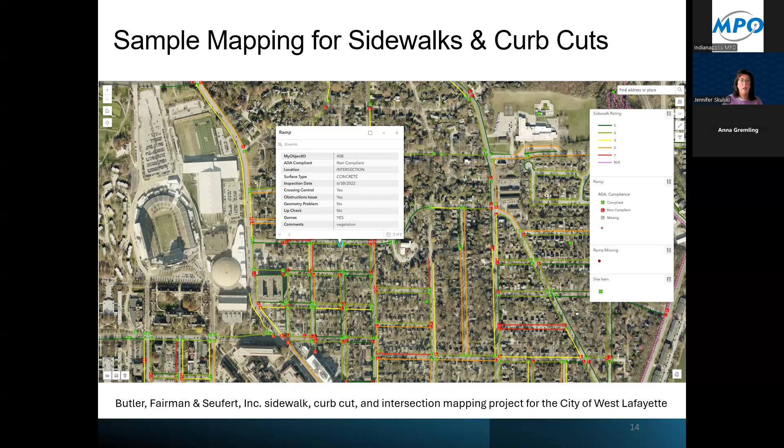You could do that manually. There are also a couple different programs now that use visual AI to do the mapping so that you wouldn't actually have to bend over with a smart level or a tape measure to measure the running slope or the cross slope. So some other reasons why it might be necessary to revisit your self-evaluation and transition plan: maybe it was never completed or only partially completed in the 1990s.

I will tell you, if you get an ADA complaint, during the investigation process with either the Department of Justice or the Department of Transportation, the very, very first question they're going to ask you is, where is your self-evaluation? Where is your transition plan? So those documents serve as your first line of defense, those CYA documents, to show that you know that the barriers exist and this is your timeline for removal.

Maybe you've had inquiries from the disability community about, when are you going to make a corrective action on Allisonville Road? Maybe some facilities have changed substantially from the data that was originally collected in the 1990s, and that data hasn't been updated. And so that would be another reason to revisit those. Your agency policies might have evolved.

We had a situation with a very large city that in the early 1990s had modified a policy to make it compliant with the ADA. And then with all that staff turnover, the policy got changed back to its original, and it was no longer inclusive or welcoming of people with disabilities. And so that was one thing that we uncovered through the self-evaluation process, that this got changed back and people didn't realize that it had been changed for the purpose of inclusion of people with disabilities.

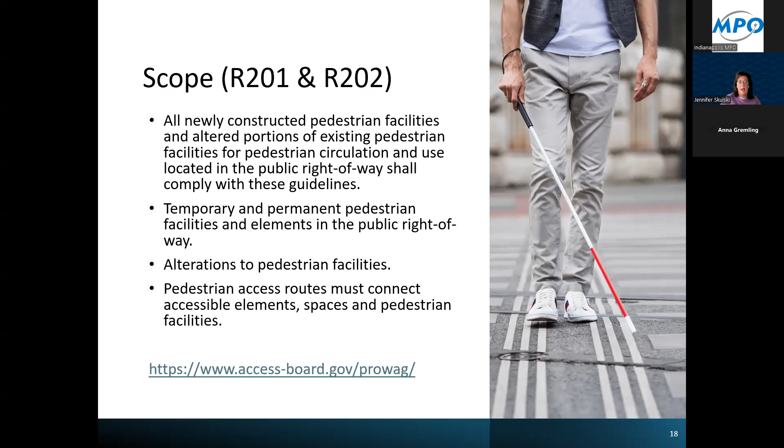So if you have a city block where construction fencing is going up, and they're doing construction around the entirety of the building and the sidewalk is closed, because you provided that sidewalk, you need to provide a temporary sidewalk, and that temporary sidewalk has to be accessible. Then there are alterations to pedestrian facilities, and the pedestrian access route must connect to accessible elements, spaces, and pedestrian facilities.

So some of the other scoped elements include alternate pedestrian access routes, transit stops, passenger loading zones, and detectable warnings. Detectable warnings are here to stay now. Pedestrian signal heads or pedestrian-activated warning devices, protruding objects, vertical clearance, pedestrian signs, street furniture, transit stops and transit shelters, on-street parking spaces, passenger loading zones, stairs and escalators, and handrails.

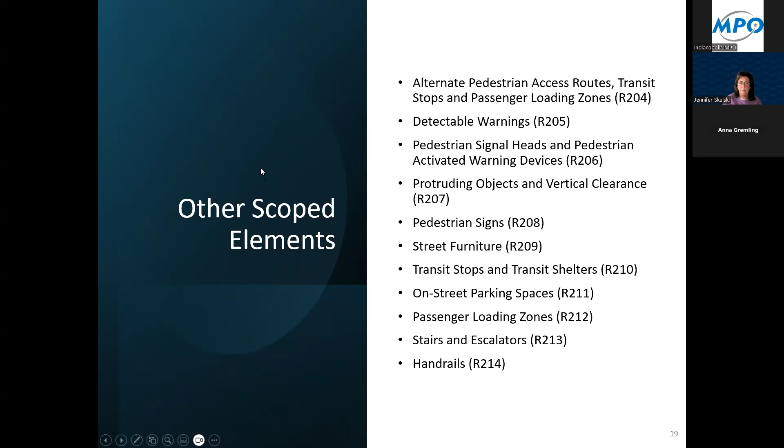So first, let's define our alteration, or what's being altered. Under the rule, an alteration is a change or addition to a pedestrian facility in an existing developed public right-of-way that affects or could affect pedestrian access, circulation, or usability. So if the area is not developed, meaning it's basically an open farm field that has been turned over to the municipality for development, that is undeveloped. But if you put a road through it, now it's become developed. Developed is anything that contains a building, pedestrian facilities, roadways, utilities, or other elements.

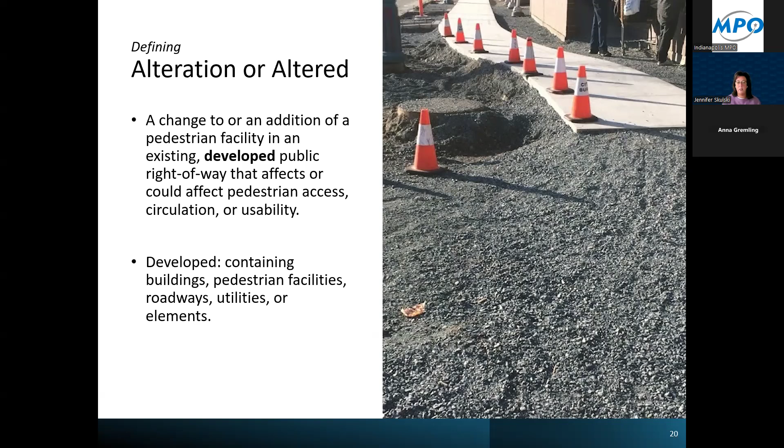So we have this concept now, an overarching concept of the pedestrian circulation path. This pedestrian circulation path is an umbrella term. It basically means any area where pedestrians are intended to use a facility. And so, that scoping requirement means where pedestrian facilities are altered, they shall be connected to a pedestrian access route. The pedestrian access route is a subcomponent within the pedestrian circulation path.

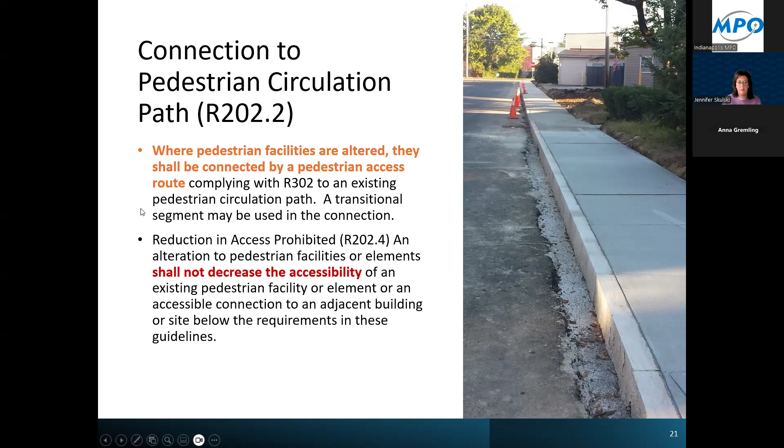In addition to that, a transitional segment may be used to connect to that pedestrian access route in areas that have been altered. There's also a specific clause added that you cannot reduce access. An alteration to a pedestrian facility or element shall not decrease the accessibility of an existing pedestrian facility or element, or an accessible connection to an adjacent building or site, below the requirements of the guidelines. There is a clause that allows you to deviate from the guidelines, but only in the event that it's providing equivalent facilitation. Again, it cannot reduce access.

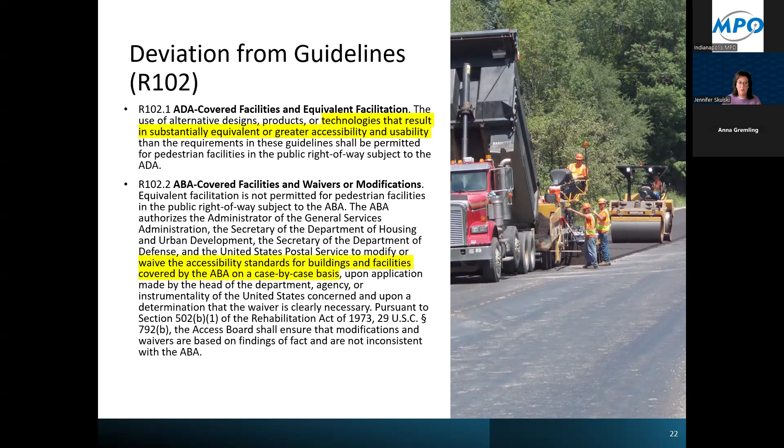This equivalent facilitation is the use of alternative designs, products, or technologies that result in substantially equivalent or greater access and usability than the requirements of the guidelines. That's for ADA-covered facilities. If you're working on projects that are federally funded or federally conducted, those are covered under the Architectural Barriers Act. If you wanted to do that type of equivalent facilitation, it actually means getting a waiver from the enforcement entity to allow for such deviation from the standards, and that is only done on a case-by-case basis.

So there is a clause. When the public rights of way came out, because I primarily work in Parks and Recreation with shared use paths, bicycle paths, or greenways, I had a lot of questions and went right to the access board with about 10 different scenarios and said, well, what do I do with this type of shared use path, or this type of shared use path? I jokingly say this is your get out of jail free card: this clause on existing physical constraints.

This is not an area that is open farmland you're about to develop. This is an existing physical space where existing physical constraints make compliance with the applicable requirements technically infeasible. You are still required to comply with the requirements to the maximum extent feasible. Existing facility physical constraints include, but are not limited to, the underlying terrain, underground structures, adjacent developed facilities, being landlocked, drainage, or the presence of significant natural or historic resources.

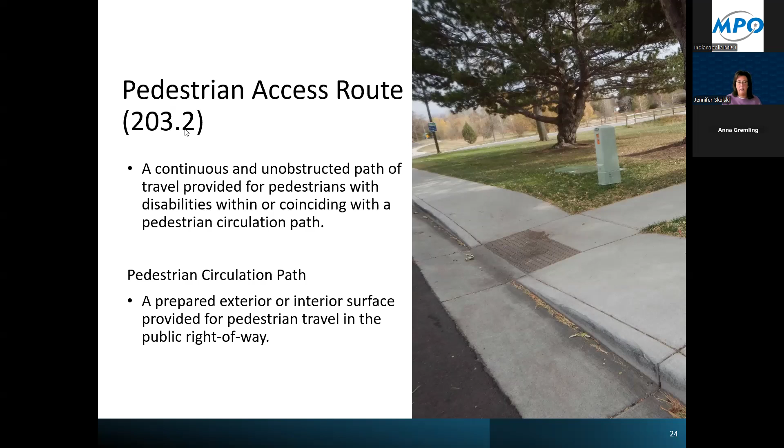So our technical requirements for the pedestrian access route: how wide does the clear width need to be? At a minimum, on our standard city sidewalk, it needs to be at least 48 inches wide. You might have a city sidewalk that is 60 or 80 inches wide, but the pedestrian access route is a clear 48-inch minimum width within that larger circulation path.

Within medians and pedestrian refuge islands, it has to be at least 60 inches wide for the pedestrian access route. Where shared use paths cross medians or pedestrian refuge islands, again that has to be at least 60 inches wide, or at least the width of the crosswalk, whichever is greater. And on the shared use path, this is substantially different than the city sidewalk: the pedestrian access route has to be the full width of the shared use path.

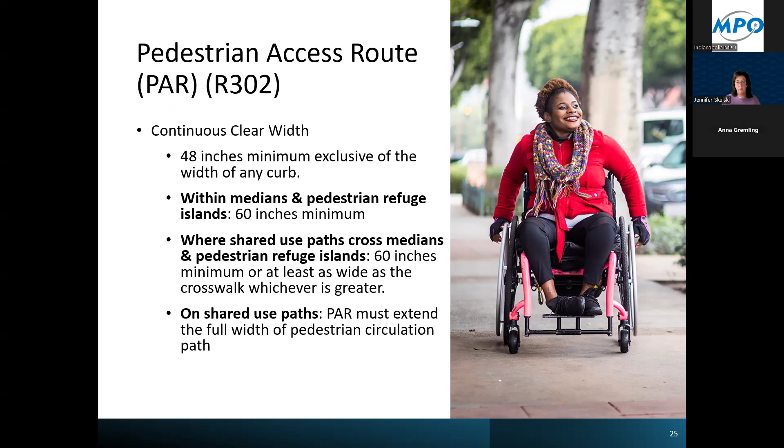Other technical provisions cover the maximum grade within the highway right-of-way, meaning the pedestrian circulation path immediately adjacent to the roadway. The maximum grade for the pedestrian access route is 1 in 20, or roughly 5%. There is an exception that allows you to use the grade of the established street if it exceeds 5% — the pedestrian access route can match the grade established for the adjacent street, but it cannot exceed the grade of the street. So if your street is at 7%, your maximum grade for the pedestrian access route is 7% as well — it could not be 9 or 12%.

There's also an exception for the pedestrian access route in the crosswalk, where the roadway is designed for a super elevation greater than 5% — it allows for that in the crosswalk. And there is a note for ramps: ramps do not apply to curb ramps or pedestrian access routes that follow the grade established for the street, consistent with the requirements of this section.

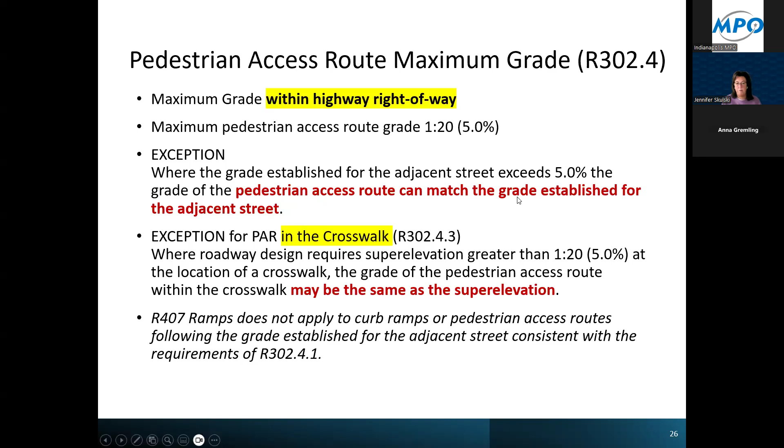For the pedestrian access route's maximum slope, we have a 5% maximum running slope, and our maximum cross slope, where we're not part of the crosswalk, is 1 in 48, or roughly 2.1%. If we are part of the crosswalk, it's dependent on where the crosswalk is located. At a yield or stop control, we're at 2.1%. If it's an uncontrolled approach with no stop or yield, you could go up to 5% for the cross slope. If there's a traffic control or a pedestrian hybrid beacon, that again allows for 5%. And if it's mid-block, or at a roundabout crosswalk, it's no steeper than the street grade.

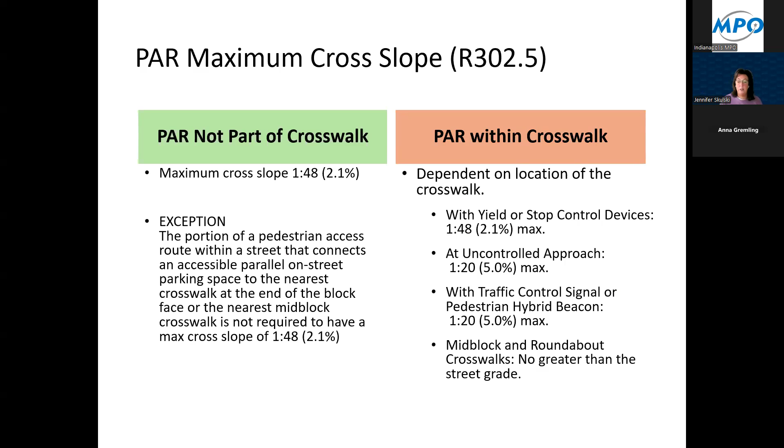So I want to give you a note about what we just talked about between the running slope and the cross slope. That is the maximum. Once you hit 5.1%, 6%, or 7%, you're out of compliance with the maximum allowable slope.

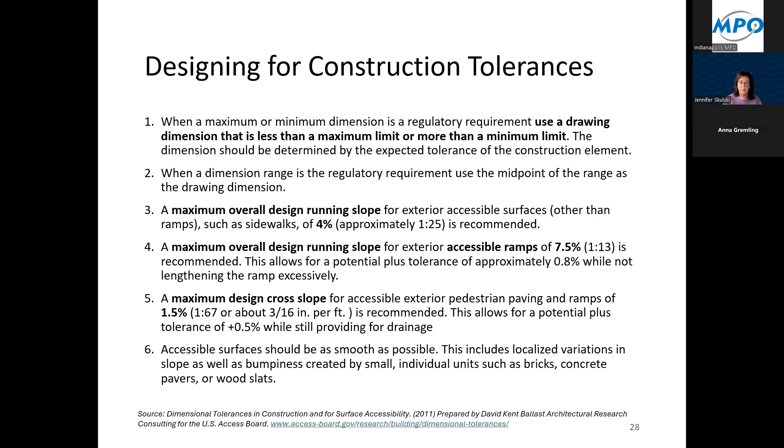For years I've worked with the National Park Service and the Denver Service Center. They had established their maximum design standards to allow for construction tolerance. The Ballast recommendations are a little more stringent than even the Park Service designs. So if your accessible route's maximum slope is 5%, the Ballast study recommends designing at 4%. If your maximum slope for a ramp is 8.33%, the Ballast report recommends designing for 7.5%. If you're looking at cross slope or accessible parking spaces where the maximum slope is 2.08% in all directions, the Ballast report recommends designing to 1.5%.

Back to our pedestrian access route: that clear width, where the clear width is less than 60 inches, there's a requirement for passing spaces. This is the same as the accessibility standards for the indoor environment, where if that route is less than 60 inches, you have to provide passing space at intervals no greater than 200 feet. That passing space has to be at least 60 inches wide by 60 inches deep.

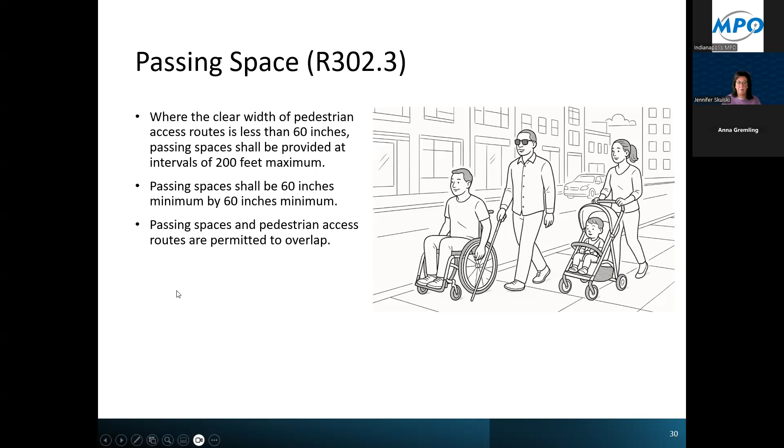Changes in level: the requirement is the same as it is for the indoor environment. Grade breaks have to be flush. You can have vertical changes in level up to 1/4 of an inch, but anything between 1/4 inch and 1/2 inch needs to be beveled. In the outdoor environment, this is the number one deficiency we end up writing up that becomes part of the transition plans—most frequently where two different types of surfaces meet and the change in level either hasn't been beveled or is greater than 1/2 of an inch.

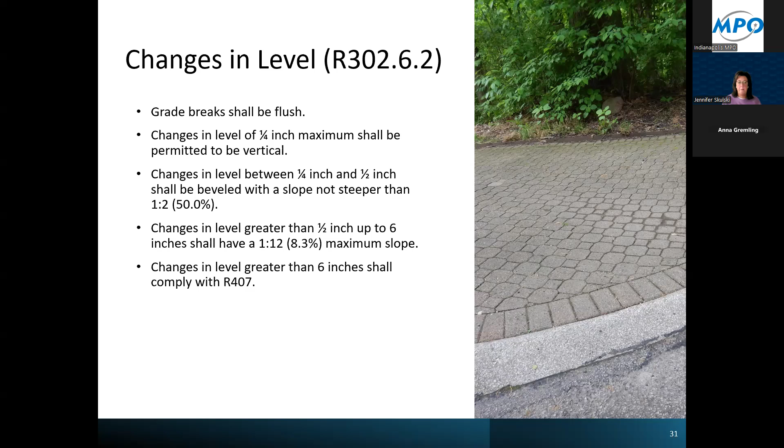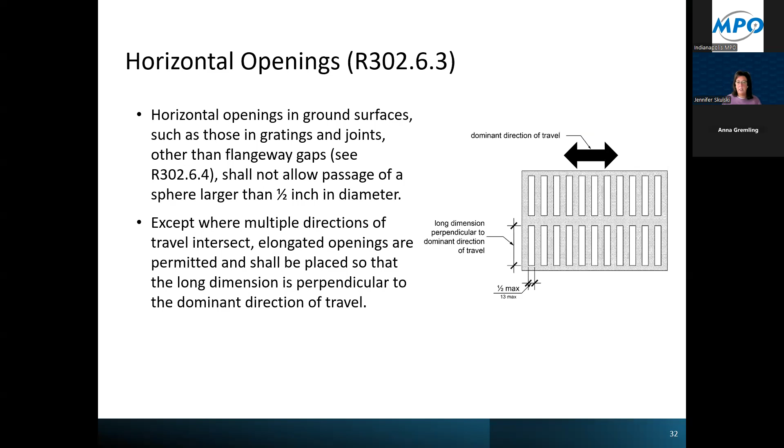Horizontal openings: this is pretty close to the same as the built environment under the ADA standards. It basically says openings in the ground surface cannot exceed the passage of a sphere more than 1/2 of an inch. It does allow those openings to be elongated; however, they should be installed so they're perpendicular to the dominant direction of travel.

This is very helpful, especially for those working on shared use paths where you might have some type of railroad crossing that's still an existing railroad or where you're not able to remove the tracks. There's more guidance now about what that surface opening can be, and that's dependent on what type of regulation applies to the at-grade rail crossing. If it's regulated by the Federal Railroad Administration, the flangeway gap is allowed to be 3 inches wide maximum.

And if it's not regulated by those safety regulations of the Federal Railroad Administration, then the maximum gap is 2.5 inches.

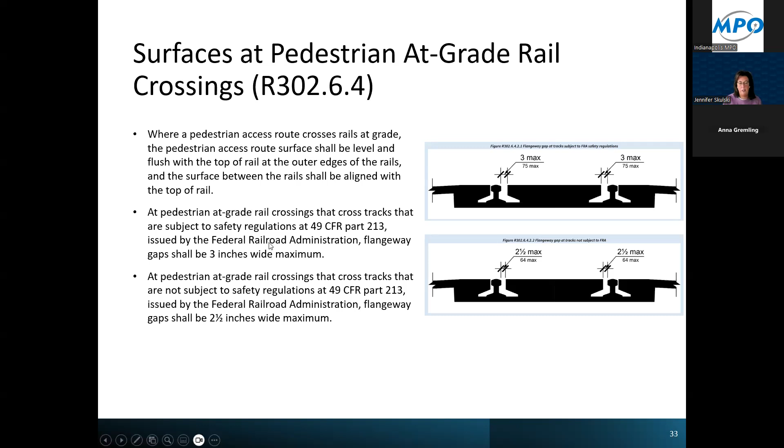For alternative pedestrian routes, if you have to provide a temporary sidewalk, you need signage. This is one of the few places where the accessibility standards specifically require signage identifying the alternative pedestrian route at decision points, giving people enough time to react—maybe they'll change their mind about which side of the street to use, or use something different from that temporary route. The surface of that route cannot be less accessible than the path that was temporarily closed, and there's a minimum continuous clear width of 48 inches.

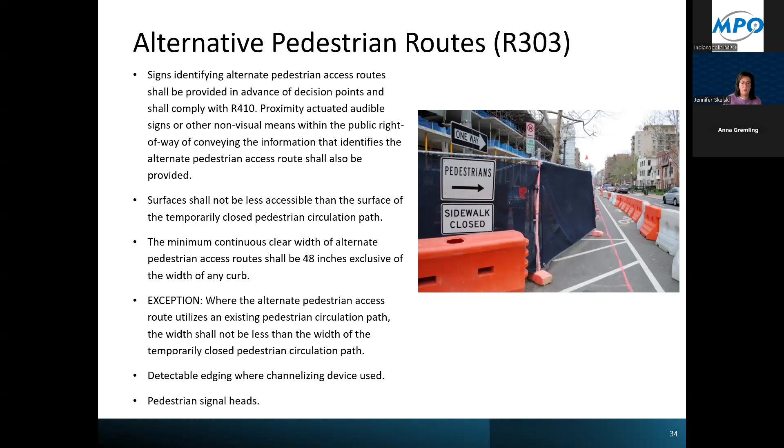There's more guidance on both perpendicular and parallel curb ramps, on the maximum allowable slope—typically that 1 in 12, or 8.3%, which has not changed at all. The most significant difference I wanted to make sure you're aware of is that for shared use paths, the clear area has to be as wide as the shared use path. So the curb ramp itself is the entire width of the shared use path, and the clear area also has to be the entire width of the shared use path.

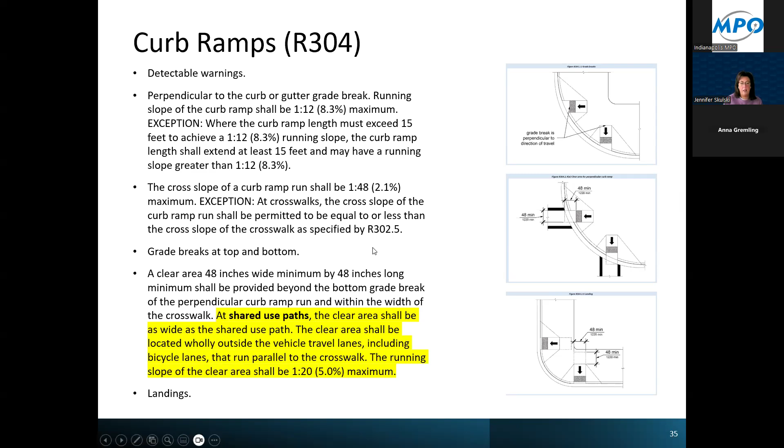The same type of thing with blended transitions. If we have a curb ramp that can go over 5% and up to 8.33%, a blended transition is one. It's like a curb ramp, but it does not exceed a slope of 5%. This is where I would recommend, if you can use a blended transition, use that instead. The very first version of the ADA accessibility standards under ramps actually used to say you should use the least possible slope. So wherever you can use the least possible slope, that would be what we'd recommend. So the running slope there, the maximum is 5%.

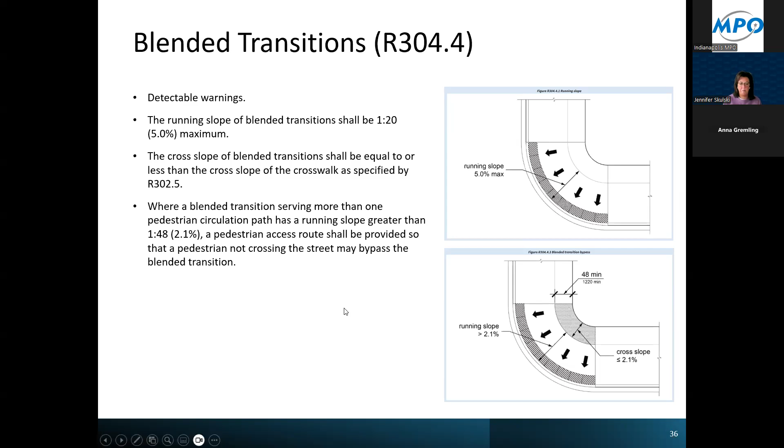Other common requirements for curb ramps and blended transitions that are not part of the shared use path: the clear width of the ramp or blended transition still needs to be at least 48 inches when it's not part of the shared use path, but when it is part of the shared use path, it has to be the total width of that shared use path.

And then considerations at gutters and streets where a change of grade occurs: the change of grade shall not exceed 13.3%, or a transitional space shall be provided at the bottom of the running slope, the curb ramp, or the blended transition.

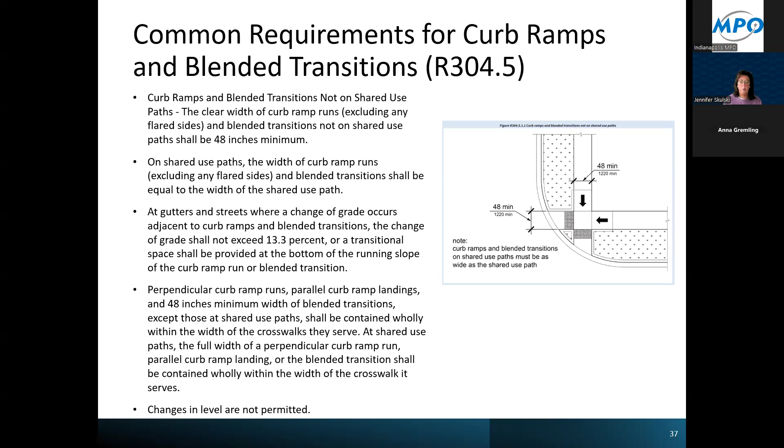Perpendicular curb ramps, parallel curb ramps, landings, and the 48-inch minimum width for blended transitions, all of those, except for shared use paths, shall be wholly contained within the width of the crosswalk that they serve. And again, going back to the shared use path, that full width shall also be wholly contained within the crosswalk. Changes in level, specifically at curb ramps, blended transitions, and in the crosswalks, are not permitted.

One of the few technical provisions that address the needs of people with visual impairments is in regards to protruding objects and vertical overhead clearance. We need to maintain a vertical overhead clearance of at least 80 inches above the ground surface. Anything along the greater pedestrian circulation path, not just the pedestrian access route but the greater circulation path, cannot protrude more than 4 inches into the circulation path. If it does protrude more than 4 inches, then it needs to be cane detectable, with the leading bottom edge no greater than 27 inches.

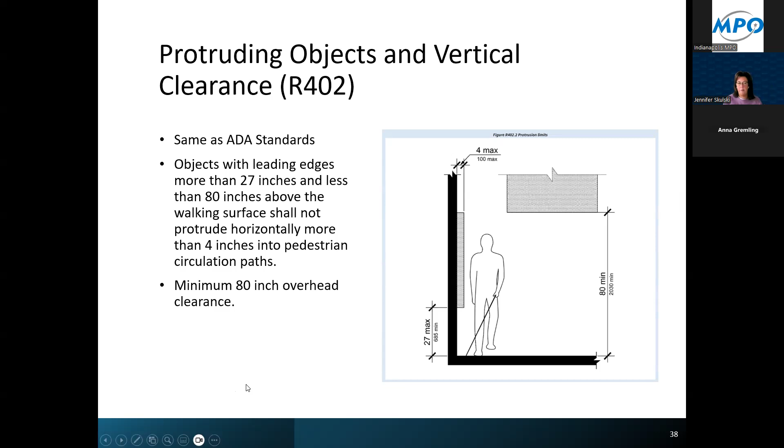There are other technical provisions, and for the purpose of our time and to be able to take questions if you have those, I'm not going to go into all of these other areas, but just highlight a couple of them. There are other technical provisions.

So detectable warnings, crosswalks and crosswalks at roundabouts, accessible pedestrian signals. I just like roundabouts is bold here, and I think it's kind of a joke in Indiana now because we're becoming so used to it. But in my hometown in Rockford, Illinois, they have their first roundabout, and it took months for people to figure out how to use those. But anyway, so roundabouts, accessible pedestrian signals, transit stops and shelters, and passenger loading zones.

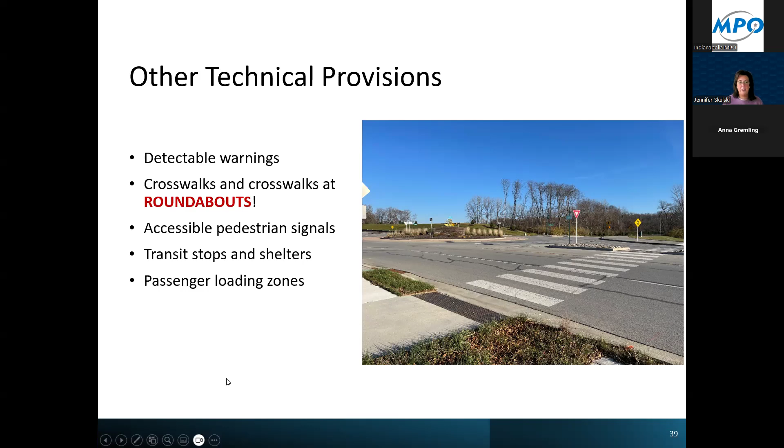Some areas I want to make sure and highlight with you all, based on the kind of overlap of shared use path and sidewalks and funding for those types of projects. First, on-street parking. It might be very common for you to have a project that is beneficial to a facility of your municipality that does not necessarily have a parking lot, and the only way people can drive to it and park there is if there's available on-street parking.

An example here: neighborhood parks are most known for being smaller in size, but they don't typically have parking lots. So we have much more specific technical provisions for what an accessible on-street parking space looks like.

If you're familiar with the notice of proposed rule, that space used to be determinate about what your encroachment was, or how much space you had in the easement, so to speak. That used to be there, and there used to be a trigger about whether or not you had 14 feet of clear width, which indicated whether or not you had to have an access aisle adjacent to the accessible parking space.

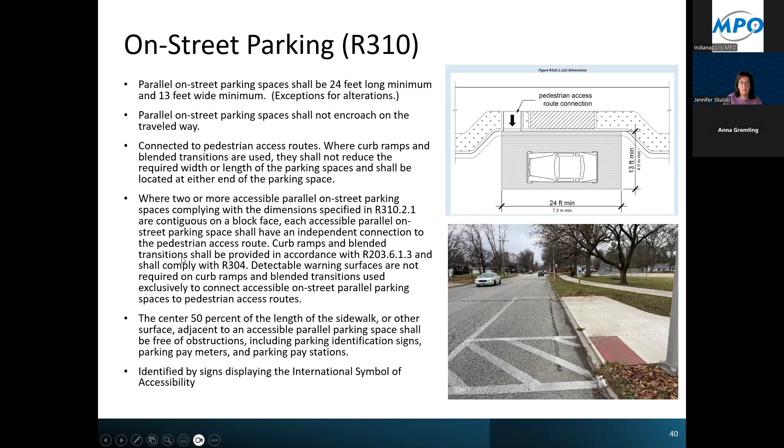For the purposes of our conversation about shared use paths and other amenities, I want to make sure we're clear on these different types of paths and how they're defined by the federal accessibility guidelines or standards. In the ADA accessibility standards, we have an accessible route that could be indoors or outdoors. We have to have at least one that connects the accessible buildings, facilities, elements, and spaces on that site.

On a college campus, you could have an exterior accessible route that connects those buildings, but you have to have at least one that connects the site arrival point, the main entrance, and all of those different accessible elements and spaces. Outdoors, we have some additional definitions under different guidelines or standards. The reason I'm sharing these is that they have different technical provisions, and in some cases allow you to have a steeper slope.

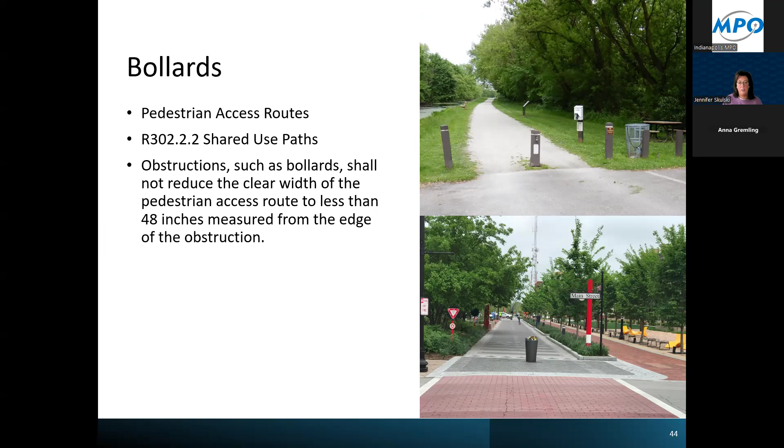And some people would argue if you have to have at least a 48-inch opening, what's the point of the bollard anyway? If you're trying to prevent vehicles from going down the shared use path, maybe it needs to be a different point of entry altogether. In the lower photo there, the bollard is actually a planter, and I didn't have my tape measure out that day. It may or may not be 48 inches on the left. It's definitely not on the right. So if you have those types of projects that have been completed, I would definitely go back and take a look-see at those.

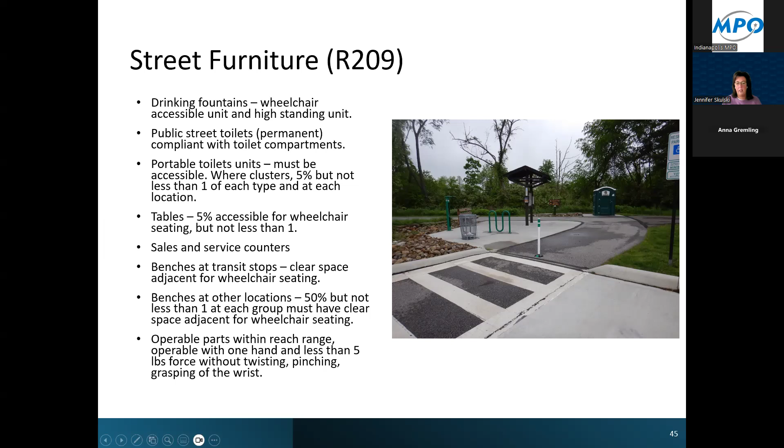Picnic tables that are in grass, if you're providing that table, it needs to be part of the accessible route. Changes in level on surfaces where two surfaces meet, or where you have a lot of asphalt heaves, mapping those out, putting them into a condition assessment and scheduling those for repair or repavement.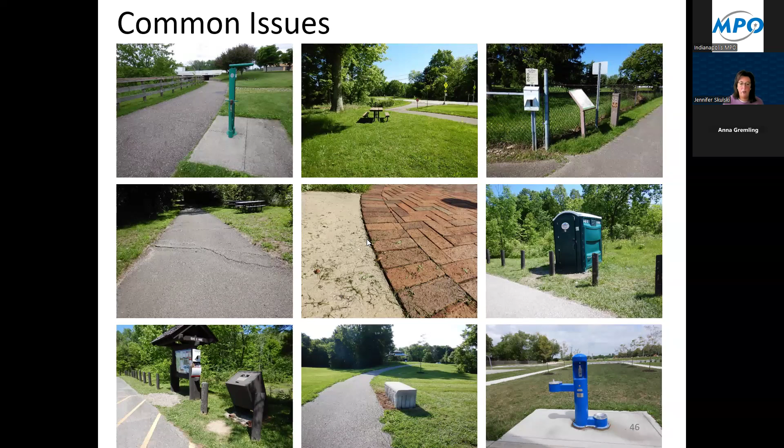We reached out to this manufacturer because we were finding so many that were newly installed and non-compliant. And we said, we can show you how to make this accessible. And so they have a brand new unit that has all the bells and whistles on it, the high fountain, the low fountain, the doggy bowl, and the bottle filler, and everything is accessible. The high unit is also cane detectable. So, if you are buying furnishings, make sure that they meet the accessibility standards.

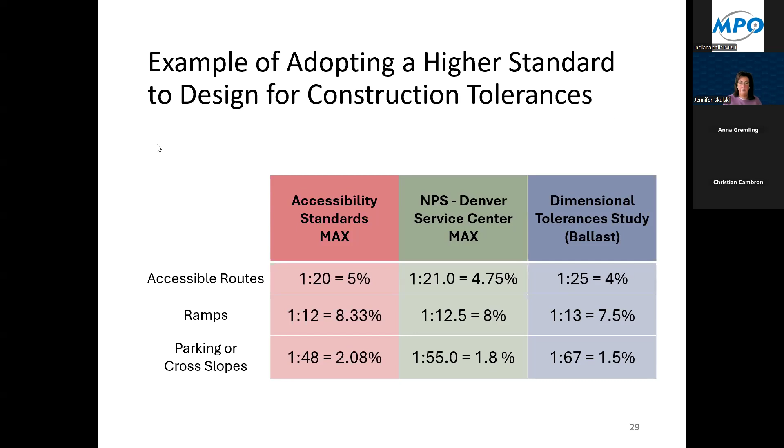Okay, so let me get to your homework, which I would highly recommend for all of you. Again, this is enough information to be dangerous, because I could talk about accessibility for days and days. But this is to get you thinking and hopefully have a new accessibility lens as you're looking at your projects. So my recommendation for all of you is to review your most current ADA self-evaluations and your transition plans.

I will tell you, if you did the requirement for INDOT in terms of a transition plan on sidewalks and curb cuts back in 2012, you only have a partial plan. You only have a partial self-evaluation. It only deals with sidewalks and curb cuts. It does not necessarily deal with all of the program services and activities you as a municipality offer. So go back and look at that. Do you have any policies that have been modified? Do you have new policies that have been enacted since it was last compiled?